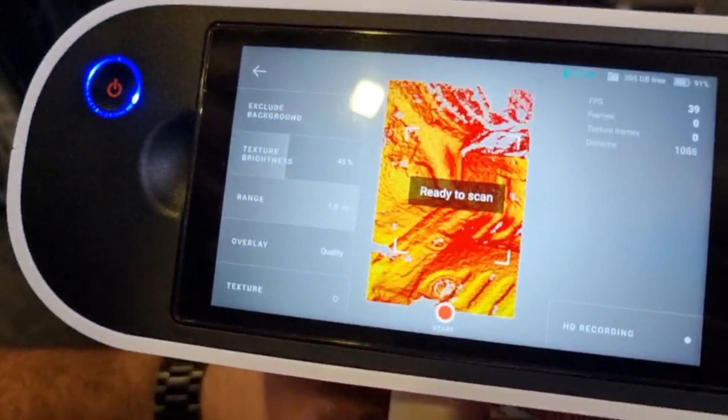So we're ready to scan it, and we're going to start scanning by pressing the button. Now what we see here is the color map changing from red, which is bad quality, to yellow to green.

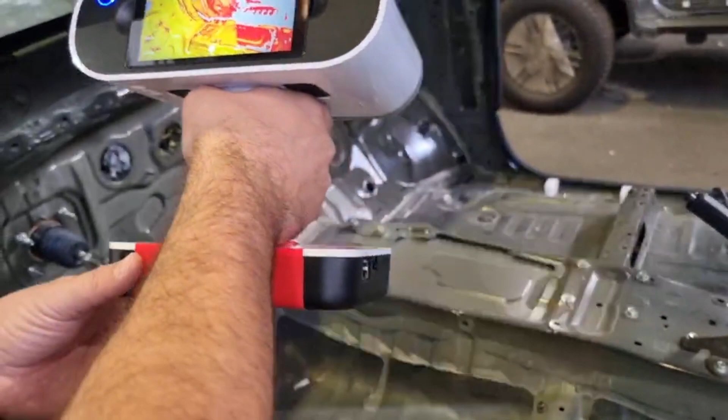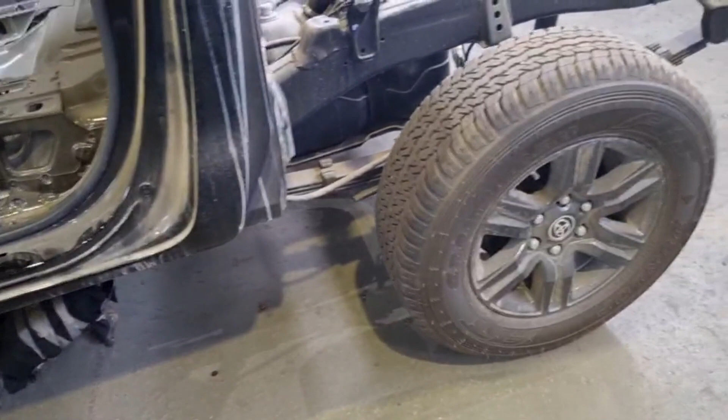So this vehicle is not prepped in any way. There are no stickers in here, nothing. We're dealing with a Toyota Hilux diesel truck that we're scanning for different purposes, because we do a lot of things with these trucks.

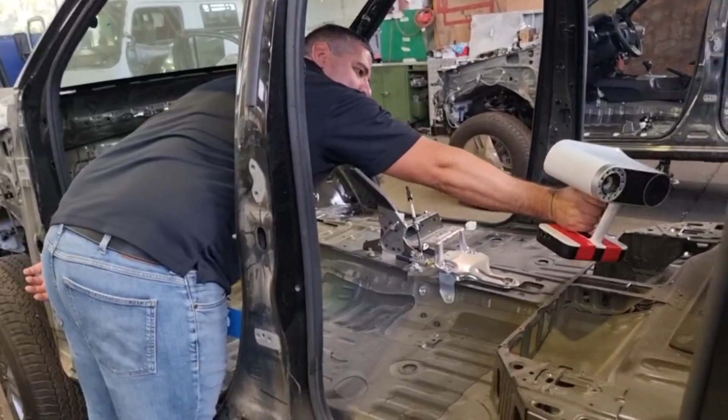So this is my associate Dima. He's working at AB Engineering, and we're scanning the whole vehicle today. It's already stripped and ready for us.

This is the vehicle that we have, which has not been stripped yet, but it will be. Try to do a thorough scan, because we never know what we need from this scan again, and we don't know if we can get back to this vehicle because it's going to be stripped.

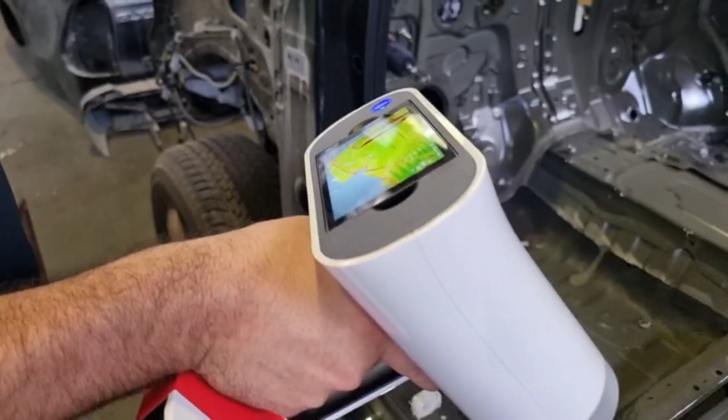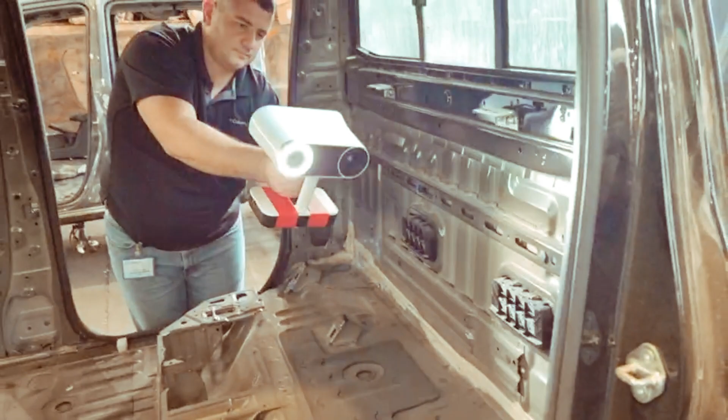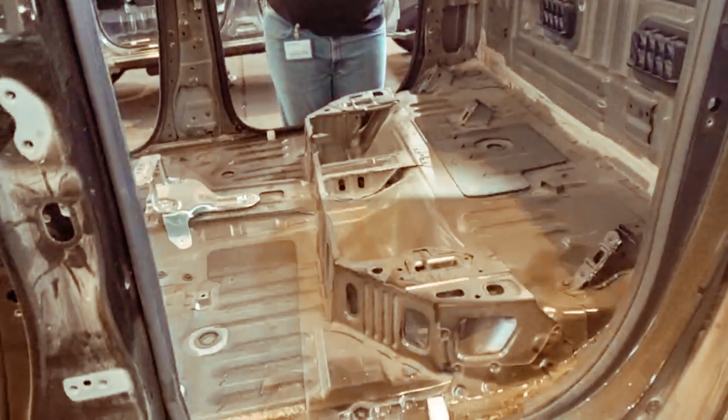We love this scanner because it's very portable. It doesn't have any cables when we scan with it, and it's a fully standalone system that we can use everywhere without any preparations, which is super nice. The biggest thing that we don't like about the scanner is the weight of it, because it's quite heavy, and the operator gets tired while operating it for a long period of time.

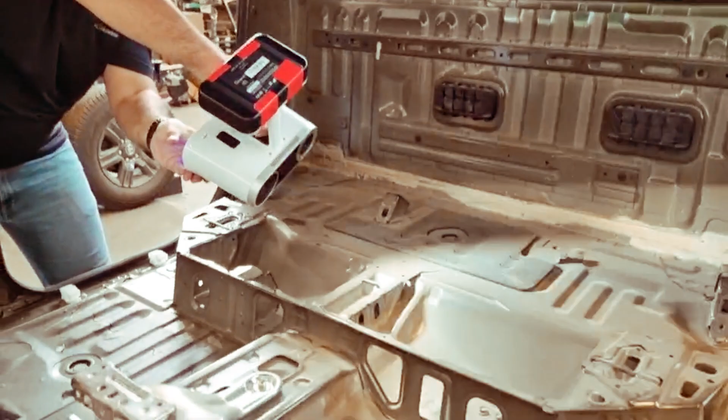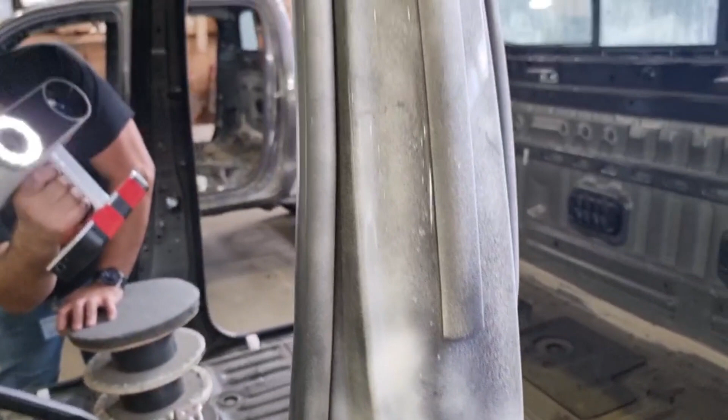But as you can see, there are no stickers. It's very important for us and for the line of work that we do. So when we have some glossy parts in the vehicle, we need to coat it with something. It's very rare that we have this, and it happens only on glass surfaces and glossy black parts.

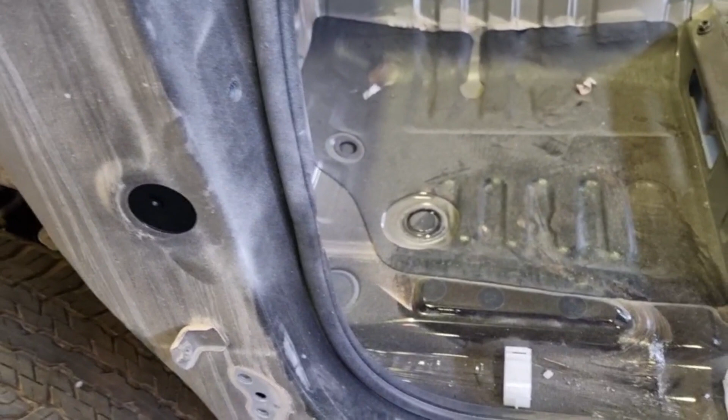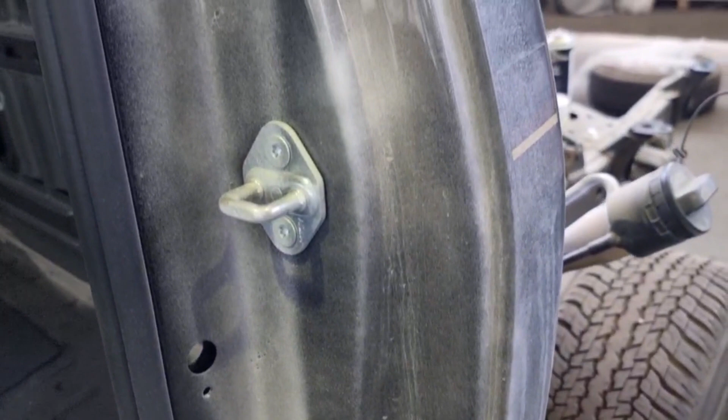So what we actually use, we found this little guy right here. It's called AESUB, a scanning spray, and they have a few varieties of it. This one evaporates in about 32 minutes to 1 hour. You spray it on a vehicle or whatever, and then it evaporates in about half an hour to 4 hours they say, but we've seen that at most it takes about an hour.

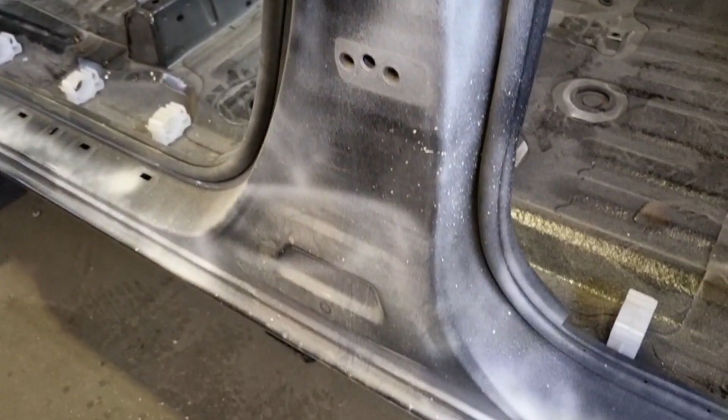So we coated the car with this, not the whole car, only the places that we needed, that are glossy, that we had some problems with.

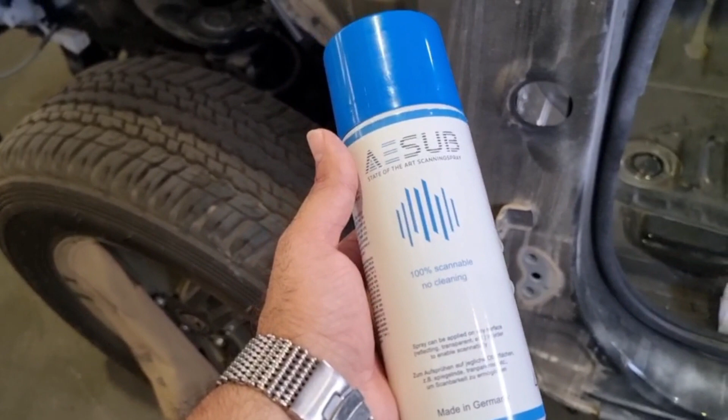First of all, this spray is really good, and we recommend it. They also have different colors of the spray, like different cap colors, and they mean different things. There are non-evaporative sprays, but we use this one because we don't have to clean the car afterwards.

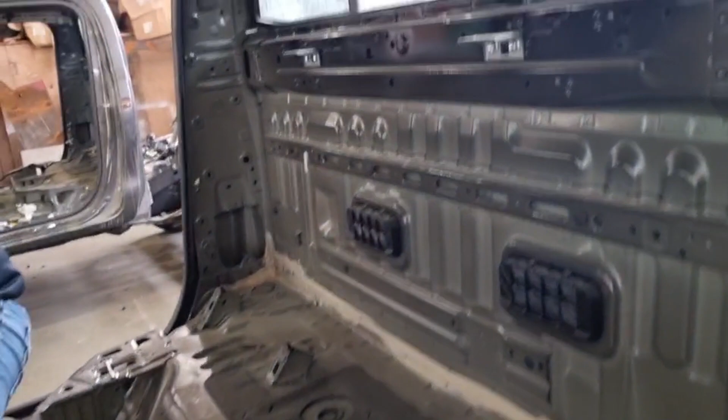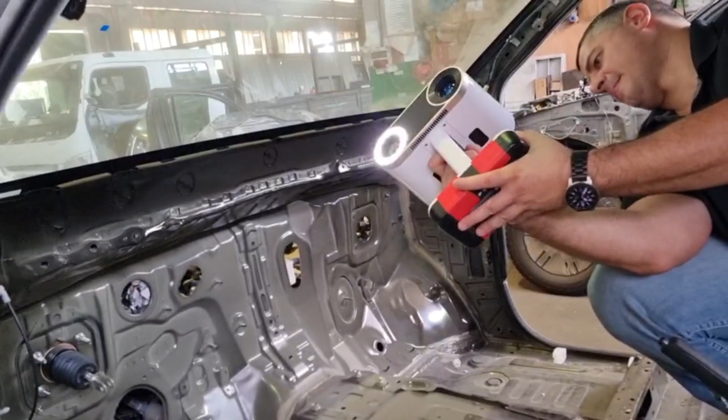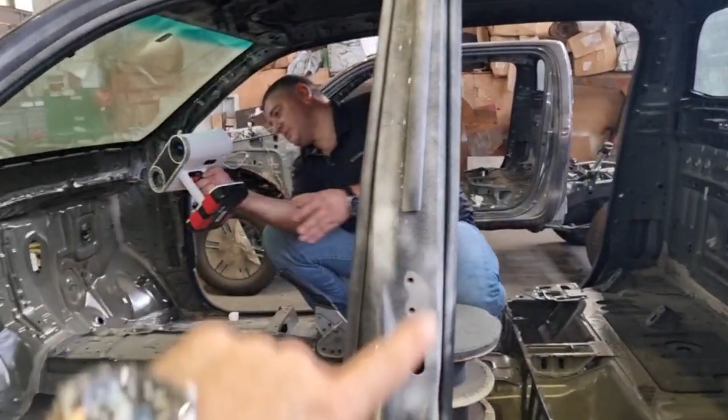Next step will be the outside pillars of the vehicle, and the chassis of the vehicle, the rear chassis, because we don't have the bed here. We use these cars for a very wide variety of uses, starting from rescue vehicles, so we have to make a new bed on the back or maybe a new capsule on the back, and sometimes we use it for armoring purposes.

And again, it's the same vehicle, different purposes. So we had a chance to scan it while it's stripped, so we took this chance, and we're going to scan whatever we can.

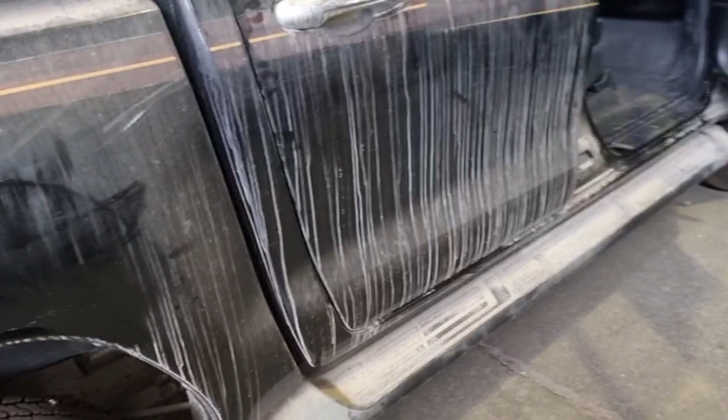Also, if we have time today, we're going to scan the outside of the vehicle, and it being very dirty is actually very good for us and for our purposes. So we're going to scan the outside of the vehicle too, because we have a project right now making different body parts and moldings for a vehicle for recreational purposes, and this is going to be on this vehicle too.

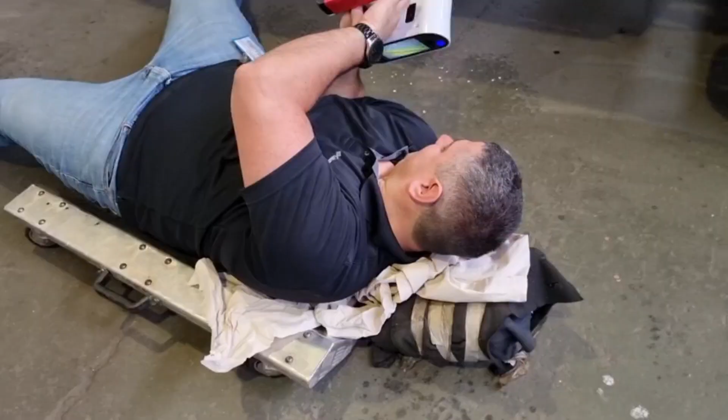So this is what we need to do sometimes. We're getting extreme here. We're doing yoga and scanning at the same time.

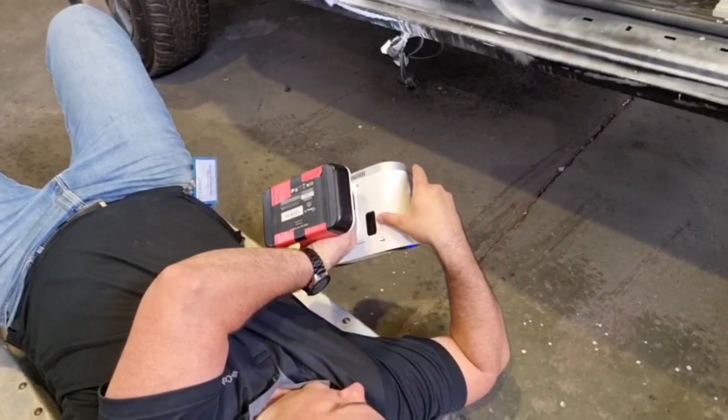So we have two cars here. One of them is without the dashboard and the center console. So we managed to scan the whole body in white on the inside, so we can see all the little nooks and crannies, all the bolts and nuts and whatnot.

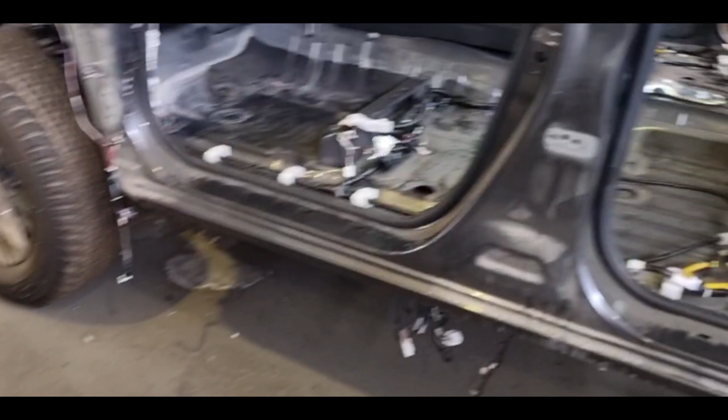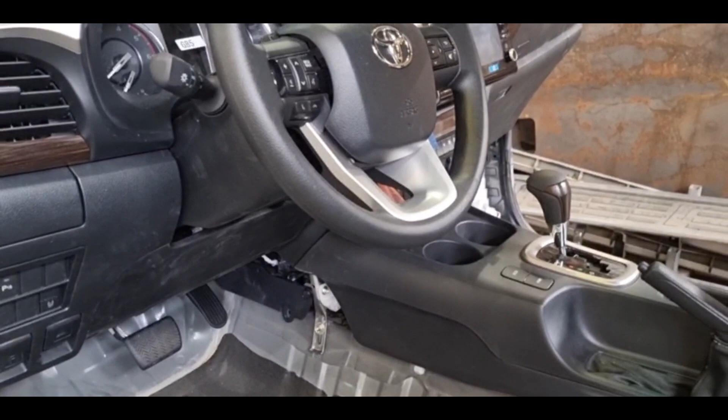And this one, we actually installed the console and the dashboard inside, so we can scan it with them inside, so we can get reference to the body in white where the things are. Okay, so we have the pedals here, and we have the handbrake and the gear lever and whatnot, and the dashboard is actually positioned in the vehicle as it should be.

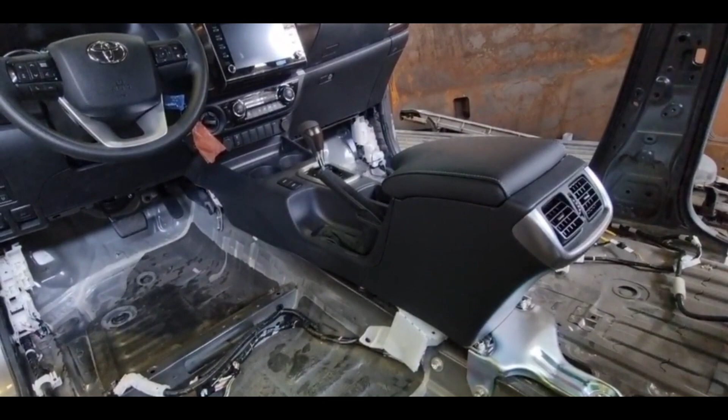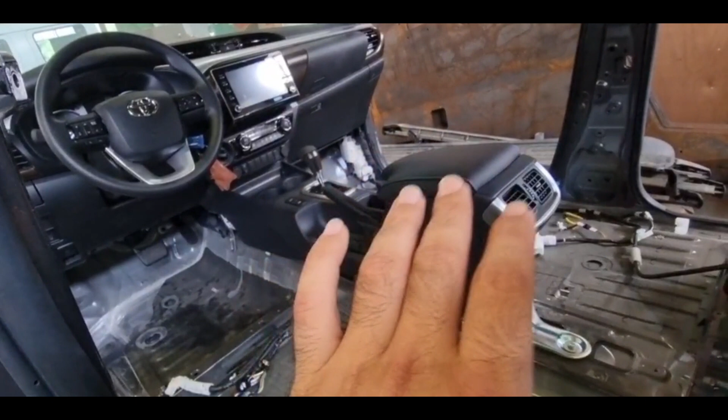Okay, so next scan is going to be the actual dashboard and center console, and then we're going to merge this scan with that scan in terms of the positioning. Okay, and then we can give the engineers the option to turn off and turn on the dashboard and the center console, which is very important for certain things.

Also, we have all the connections here, okay, and all the wiring harnesses and stuff that we need to attend to when we do whatever we do with this vehicle. Okay, this and the other vehicles that we have.

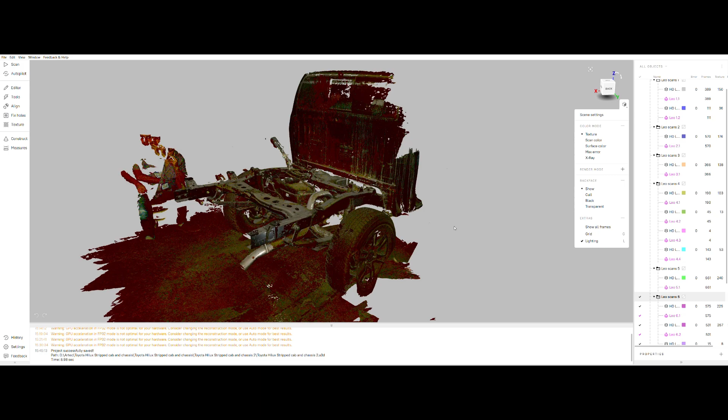So right now we have downloaded the data into the computer. It took us a while because it's huge. It's about 90 gigabytes of data.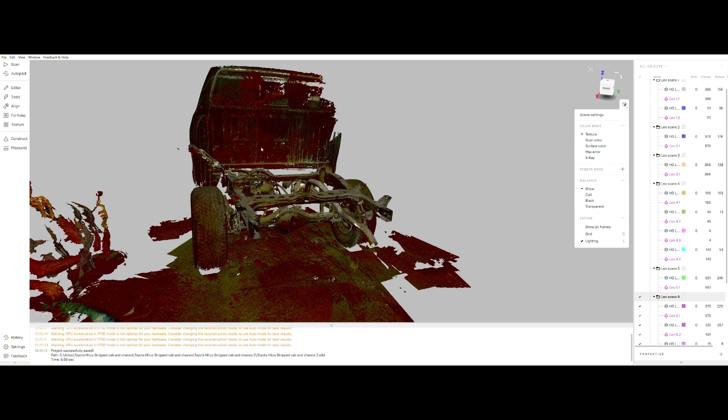And you can see that this is the rear chassis of the vehicle. Now, right now I have a texture enabled, but it's just the raw scan that we have here. It's still before the global registration and all the steps that we need to clean this model up, but we can see that the result is quite good already.

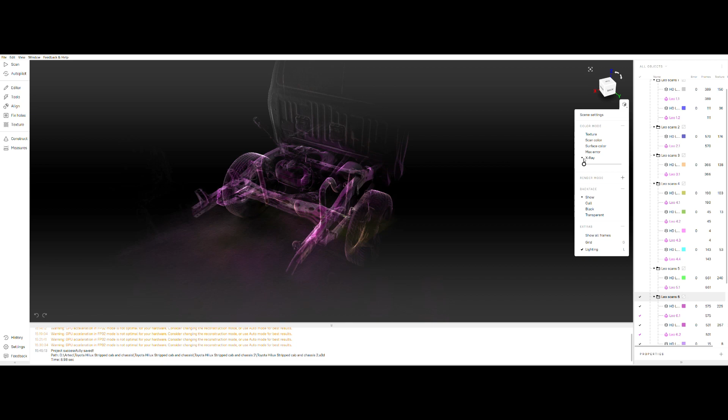We can go to X-ray and actually check it out, and X-ray gives us a good preview of the real data that we have here. And you can see that the data is really good. This one was done with an HD reconstruction of 2 point something, I don't remember exactly, but not so huge, but it's good enough for what we need because we can see all the nuts and bolts and everything.

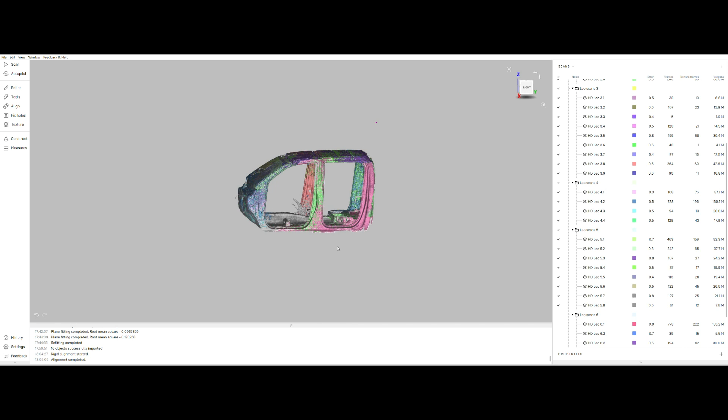So we have aligned two of the biggest scans of the vehicle. Basically, we have most of the vehicle right now. This is the inside of the vehicle. This is with Fast Fusion, but before making an STL. And this is the outside of the vehicle with the chassis.

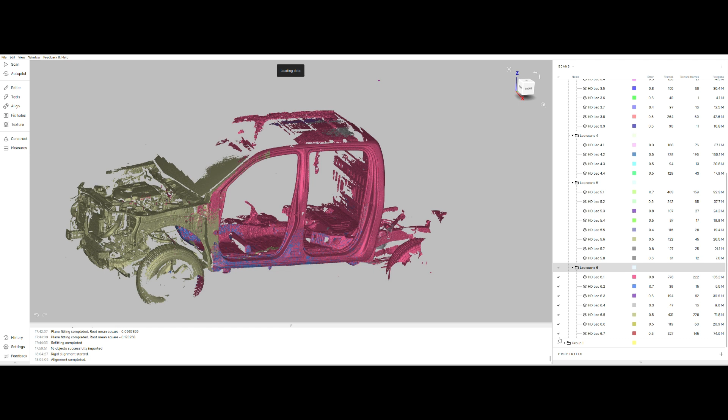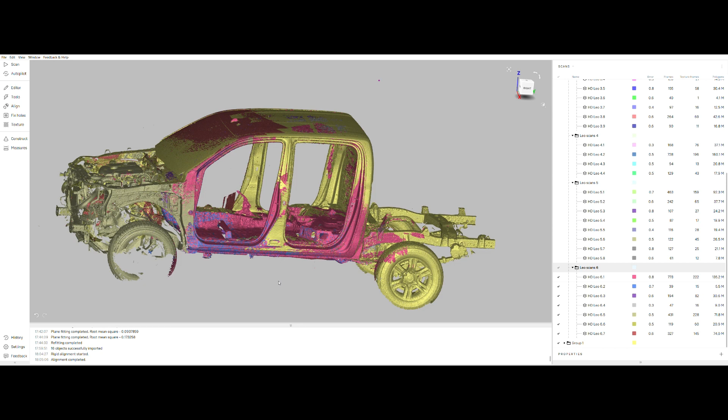So we have two big scans. I can select all of them together and make a fusion, but that's not going to be practical for many reasons, because it's going to be too huge of an STL to get into any CAD program. So right now they're all in the same orientation and they're all aligned.

Okay, so what I'm going to do right now is make two fusions, one of this and one of this. And that will give me two STLs in the same orientation, in the same axis system, so I can put it in my CAD system.

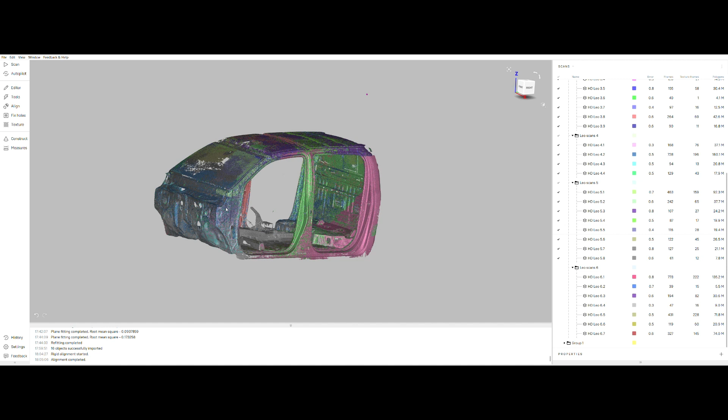So what I'm going to do later on is still cut the STLs into pieces. So I will have, let's say, the A pillar with the firewall, the B pillars, the C pillars, the roof, and the floor separated, so I can put them in separate STL files in a CAD system, so I can hide and show the pieces separately.

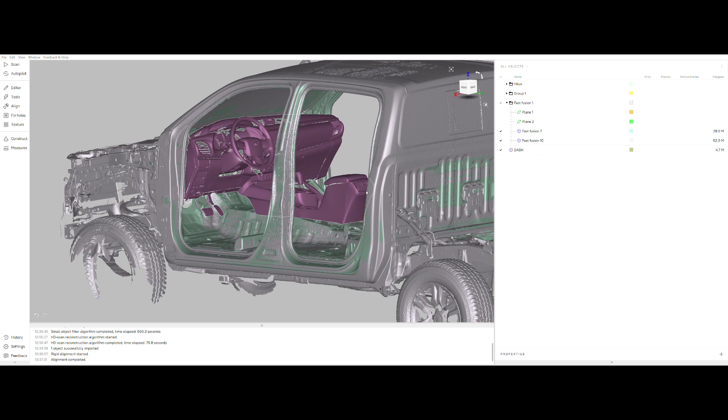So the separation of the dashboard from the vehicle, from the scan, is done, and we can see the dashboard right here, we're going to make it red so we can see it nicely. Okay, so we have the dashboard positioned in the vehicle at the same place that it should be.

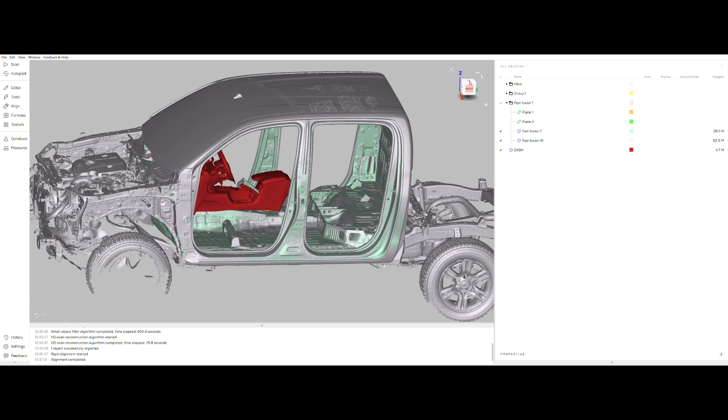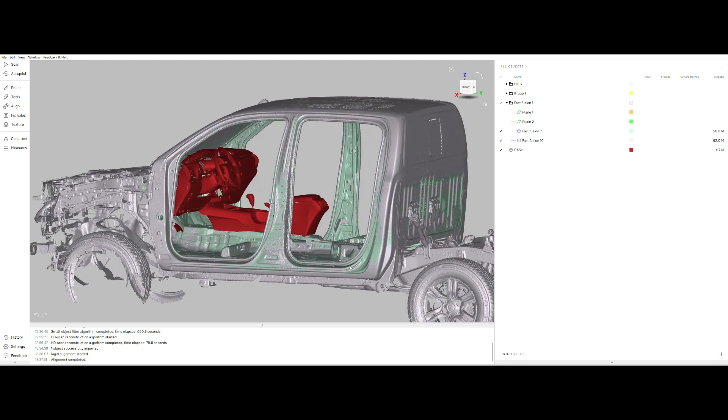Okay, so right now we're going to export the mesh, all three meshes. They're all in the same axis, and the only thing left to do is to actually position it correctly in the axis system. We have to find the center of the vehicle, the mirror plane, as we can say, because most things in the vehicle are mirrored, except for a few things like the steering box and the pedals and everything, that's not mirrored. All the rest of the bodies usually have a mirror function, so they're the same on the left and right side of the vehicle.

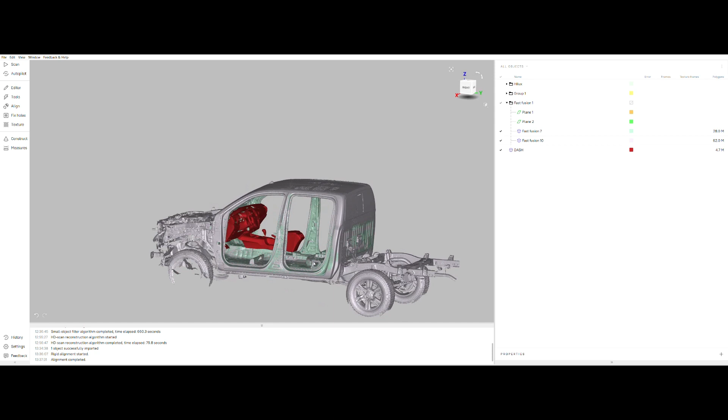So this is the part where we take the STL out of the Artec Studio ecosystem, and now we can actually use it in different CADs and different CAD systems and whatever we want to do with it.

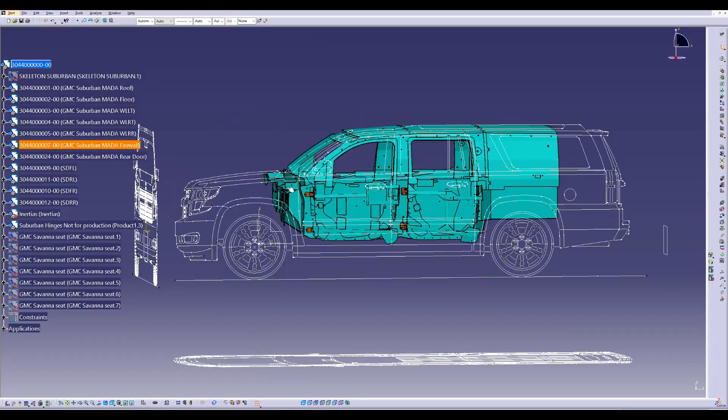So we're looking at a GMC Suburban that we've made. It's a completely armored vehicle with an armored floor, armored roof, with an escape hatch in the backside of the vehicle. As we can see, it is not armored all the way to the back because we didn't need the armor in this portion of the vehicle. Because of weight reasons, we have stopped the armoring at the third row.

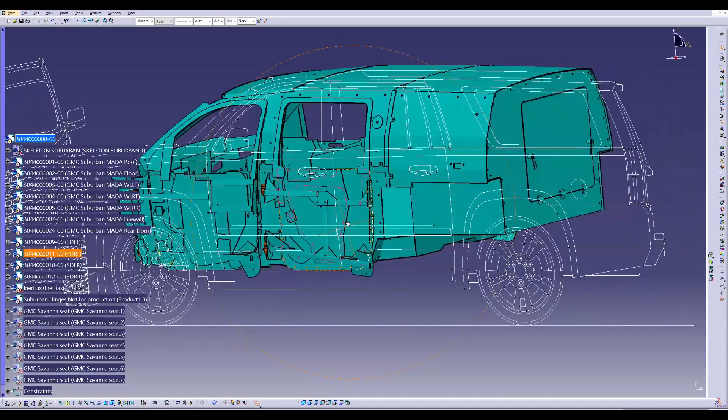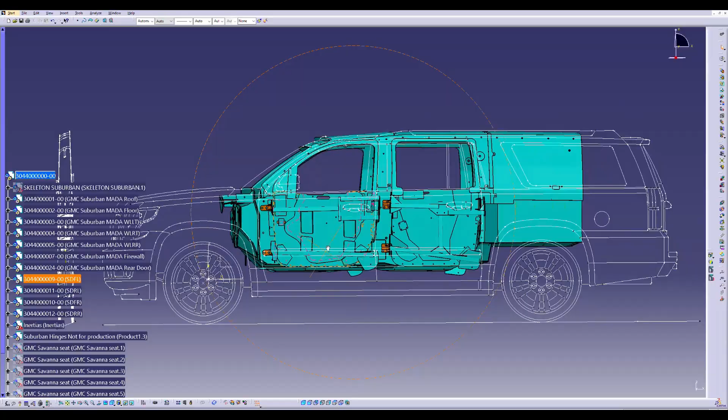So we have 3 rows of seats in this vehicle and an escape hatch, so we can actually escape if the vehicle is turned over on its roof and we're not able to open the doors. The rear hatch is not armored at all, and the glass can be broken and people can get out without problems. So basically what we have is the armor capsule here, complete with all the doors and hinges and everything. And what we used for this was the scan of the vehicle.

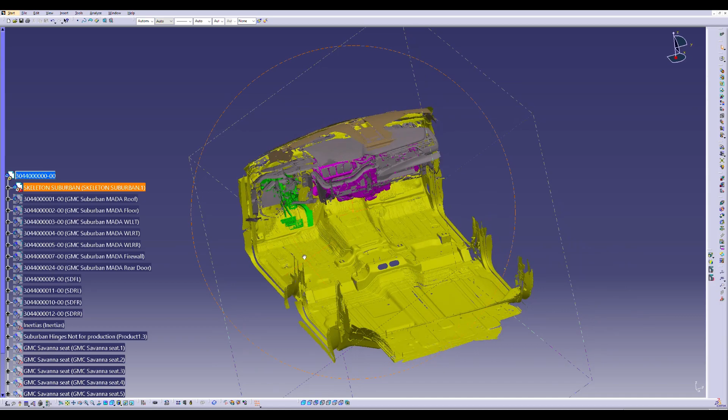We can check it out right now. So this is a scan of a vehicle. As we can see, during the scan we have captured even the glue that was glued to the floor, the sound deadening of the floor that was already glued to the floor.

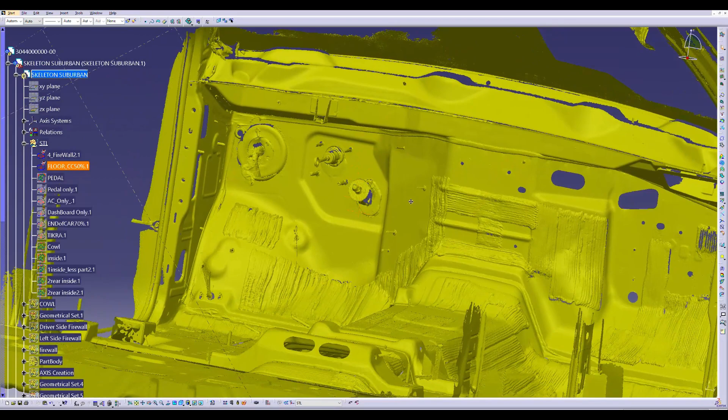We have captured the firewall in its entirety, and the firewall is one of the biggest problems in armoring a vehicle, because we have the AC systems and the pedals and all the outlets to the engine compartment, including the steering wheel and the brake booster. So we have scanned the vehicle when it was completely stripped, with all the original bolts and studs on the firewall itself.

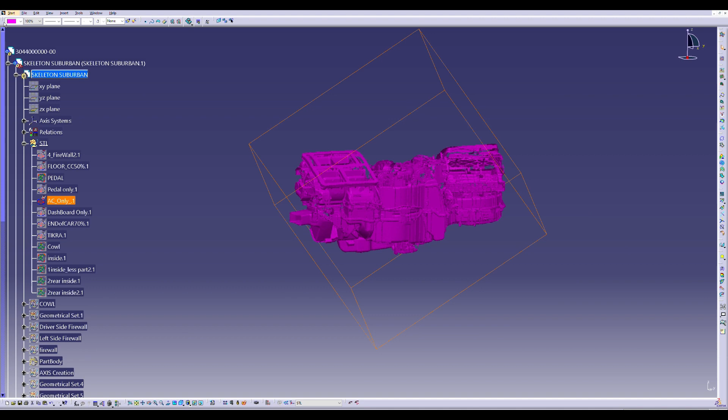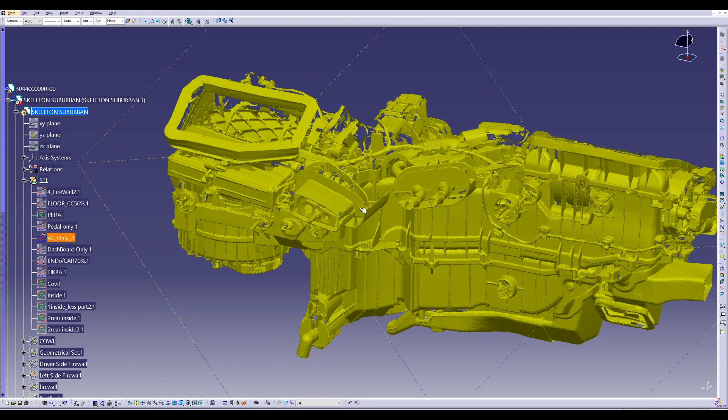Except for the firewall, we have scanned the AC compressor, AC system, air conditioning system in its entirety, on the inside and on the outside. And these are the biggest problematic places where we have the heating and cooling hoses and the AC components protruding through the firewall. That is the biggest problem in terms of armoring that we have. We have the air box here and the air filter.

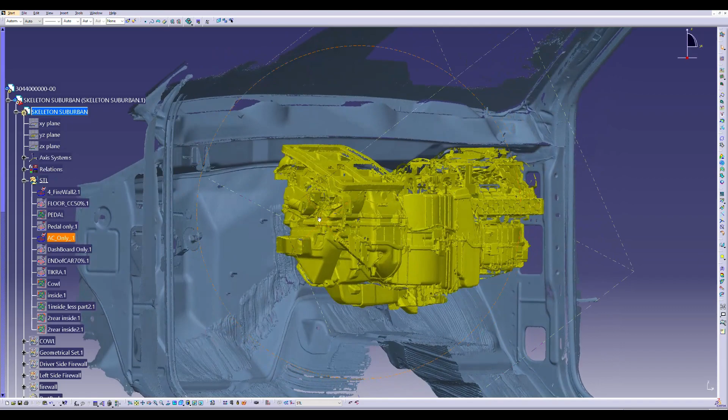As anybody in the business knows, we don't want to do anything to the AC system of the vehicle. We want to leave it as stock as possible, and we don't want to change it, because if we change it, it's not stock anymore, which is a huge problem later when we need to service the vehicle.

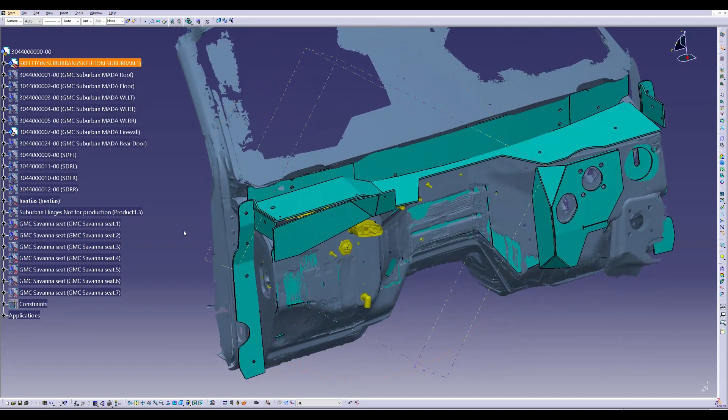Okay, so basically the goal is to service the vehicle in any dealership with, if possible, stock parts. So if we turn on the firewall armor right now, we can see that the armor is actually very, very snug to the surface, and we're trying to make minimal changes, as small as possible, to the stock AC systems.

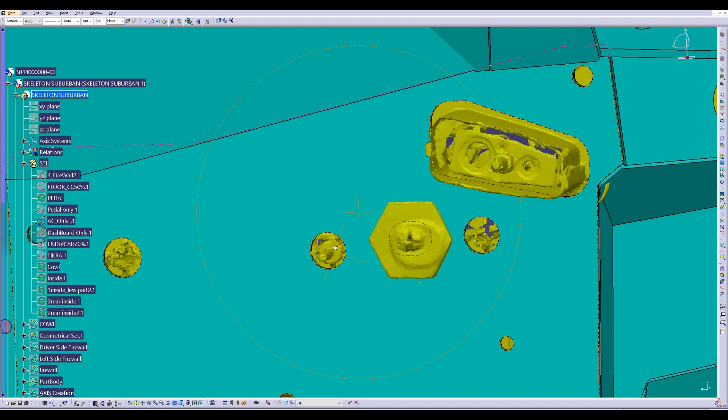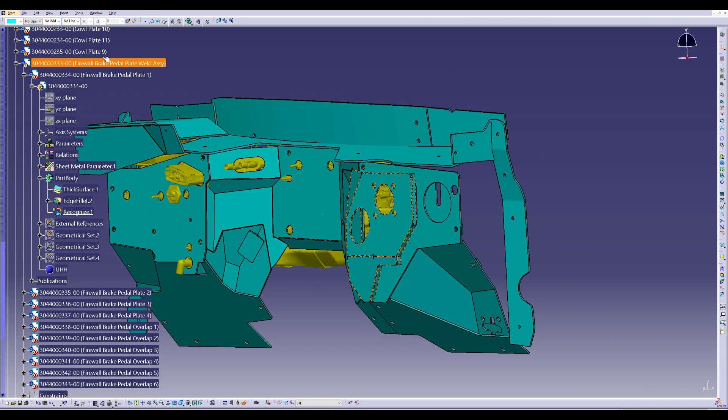So we can see here that all the connections to the firewall are kept, all the protrusions and everything is kept, and in this part of the firewall right here, it was not possible to make this part on the inside of the vehicle. So this part right here is on the outside, in the engine compartment, because the booster here and the steering column were actually in the way and we couldn't put them there.

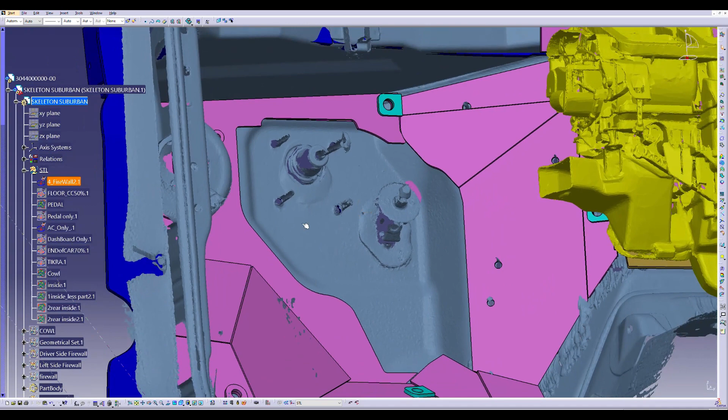So we couldn't armor this, we couldn't put this armor on the inside here. What we have is a not-armored surface on the inside of the vehicle, and an armor plate made out of a few pieces. This one is bent, and these are welded on.

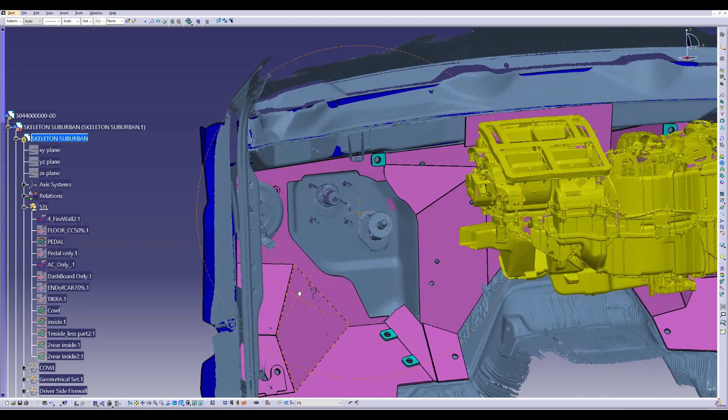That makes a complete armor solution for this vehicle. As you can see, we have the wiring harness pass through from the firewall, which we didn't want to cut - we don't want to cut original wire harnesses. So this is also an add-on plate on the inside.

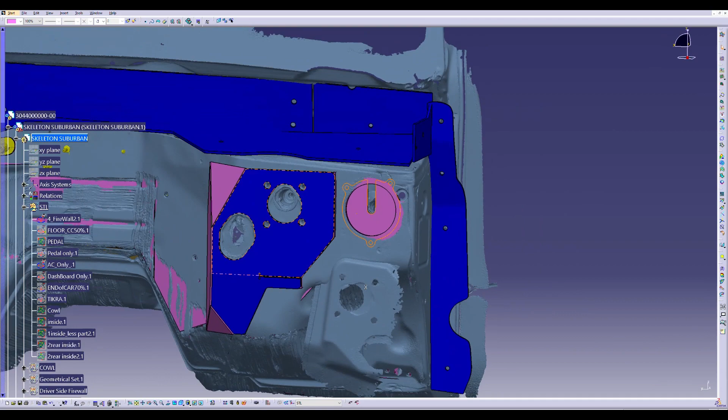So we have the minimum protrusions in the protection, and we have minimum holes in the protection. Here we have the airbox, as we can see, also the cowl of the vehicle, where we have the wipers and everything. We try to leave them stock, and the air filters and all the elements that go with the air filters - we're trying to leave them as stock as possible.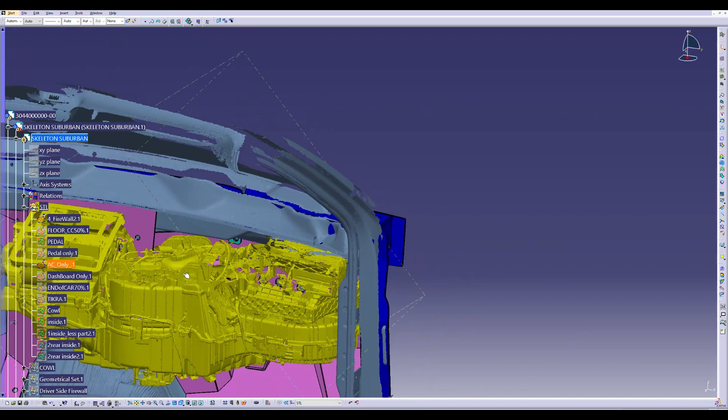So this is basically, we're trying to build a very snug suit for the firewall. The scan is actually giving us the opportunity to make it in CAD - it's about 95% done in CAD.

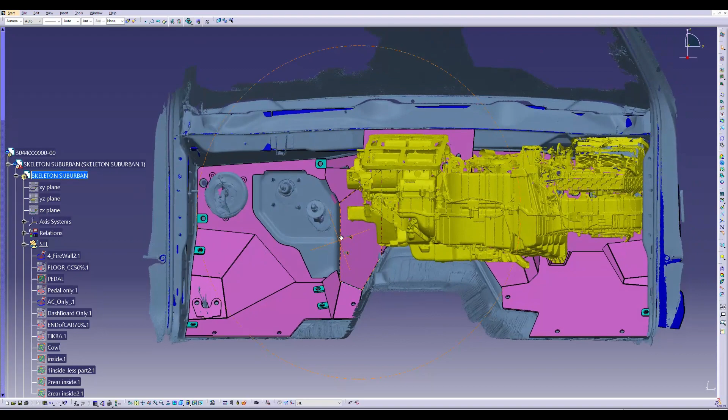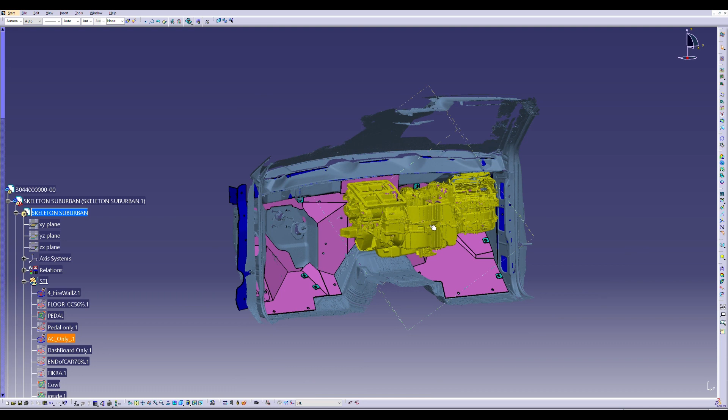Later on, we're going to weld it in the vehicle as a test weldment, and see if we have any other problems. Sometimes we need to do some manual additions to the armor, but most of it is done in the computer, and it's actually saving us a lot of time and effort, because with the old systems that we had, we didn't have the scan options - we had to do cardboard mock-ups, then wooden mock-ups, then we'd go on to steel, and then to armored steel.

With this option with the scan, we're able to do almost all the work we're going to do straight in armor steel. So basically we have the whole vehicle scanned.

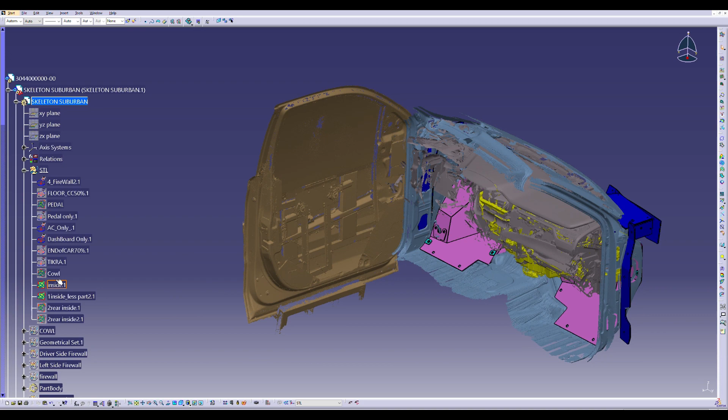We have the doors, which are also a very complex element to do, because in this vehicle the customer wanted the front windows to open. So we've built the mock-up for the window mechanism, made out of two electric motors.

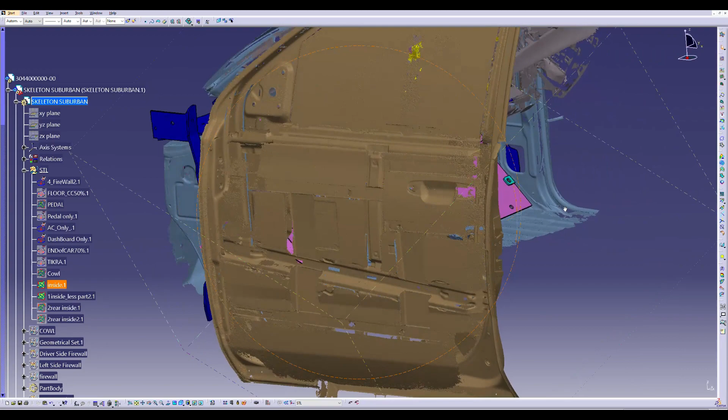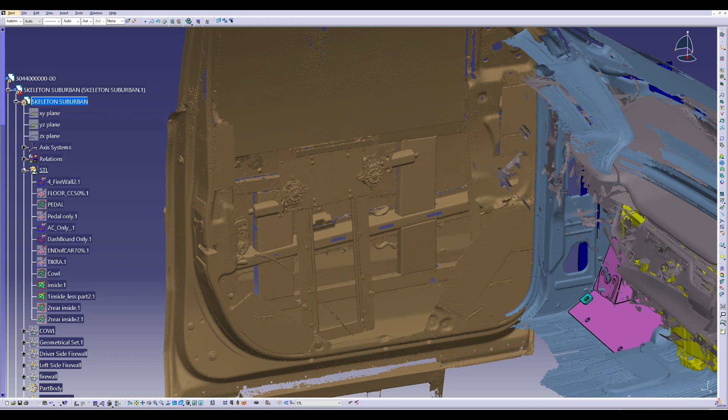Everything was scanned and then moved into CAD, because we had a few teams working at the same time. The door mechanism team is actually a team that works on its own, without scanning, without anything. They're just making the door mechanism first, the mock-up in steel, then we scan it, and then we make it into series production.

So this vehicle right here, we have the whole capsule, the whole complete vehicle.

And one more thing that we can do is we can check for ballistic holes and problems without all the real skin of the vehicle and the metal parts, so we can check that we haven't actually missed anything. Of course, the armor is not 100% in a civilian vehicle, as you know.

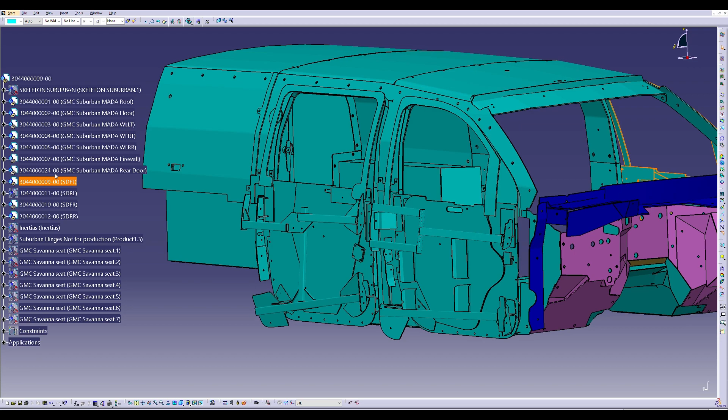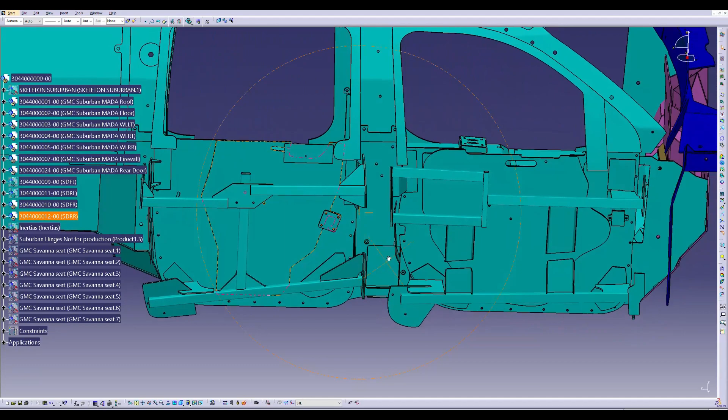We always have some places where we can have a ballistic problem, and if we're able to close it with some more additional plating, we're going to do it. If not, well, then it's a problem. Yeah, so basically that's what we do.

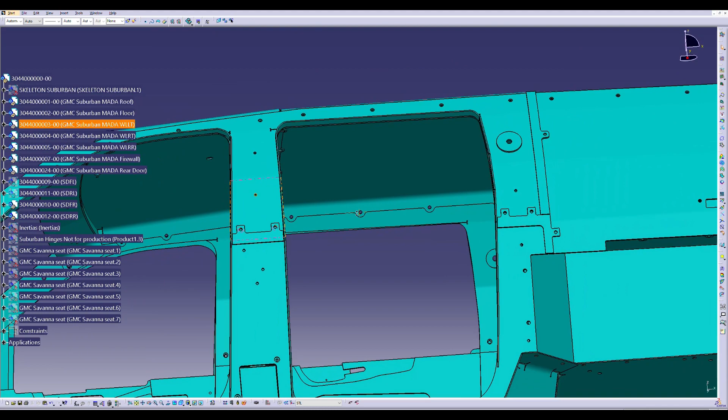As we can see here, also very important to note that this system we're using, we're actually using pre-built parts that are going into the vehicle and bolt to each other. They're not welded together, because welding is actually a huge problem in terms of armor. So we're trying to bolt stuff together if we can.

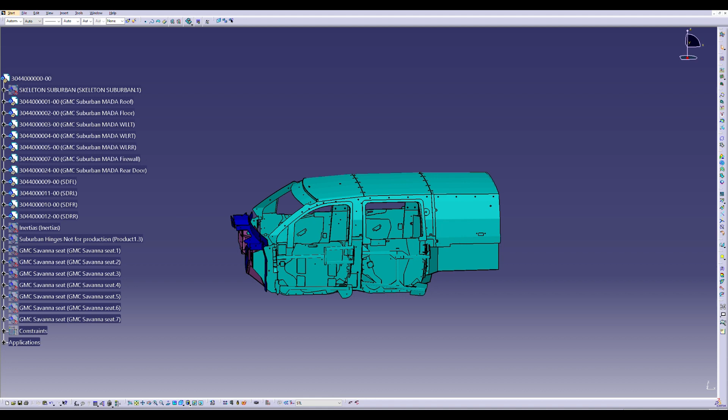Okay, so this is a Suburban that we did for a customer. We did about 10 of them. The first one was made from this CAD. We did all the corrections and everything we needed to do, and then this CAD was done, went into drawings, and from the drawings we can actually produce series production, and the repeatability is very good, which is very important for revenue. So that's basically what we have.

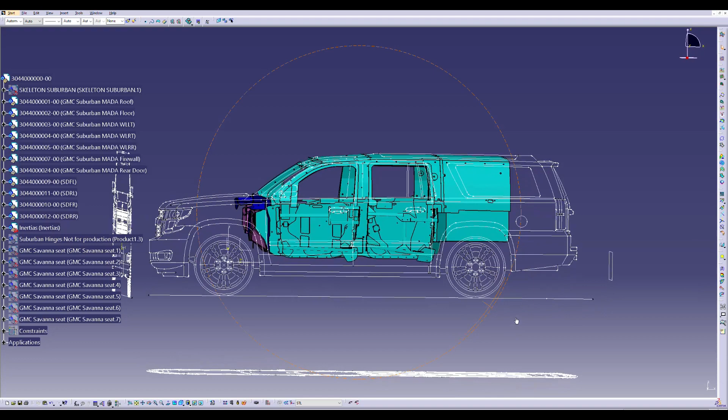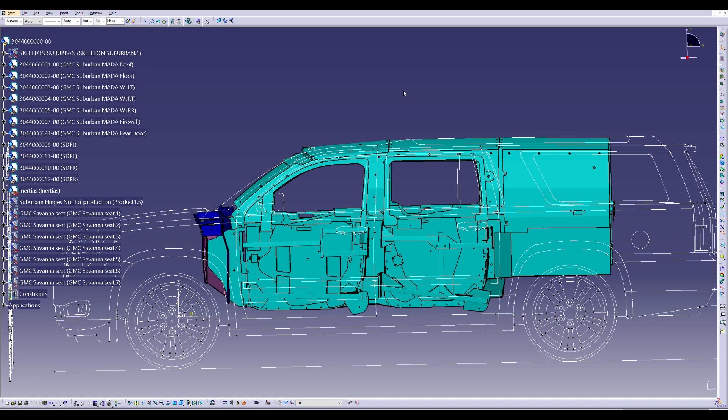Of course, we can calculate all the weights added to the vehicle because we have the drawings and the CAD data - it's not an estimation, it's 100%. We can know how much paint we need, how much weight we're adding on each axle, so we can actually estimate the things we need to do for the vehicle before it's even produced.